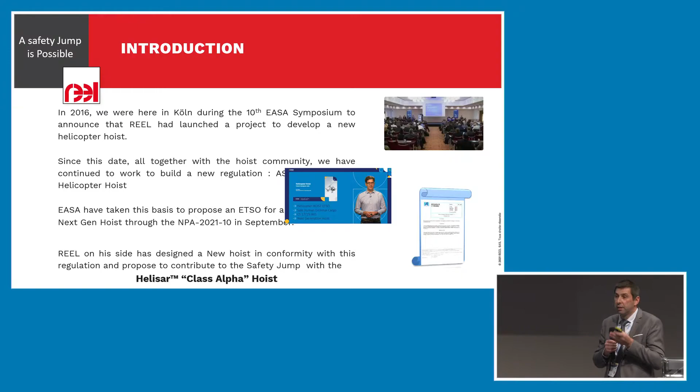It is usual to say that the safety of hoisting operation is based on 3 pillars. The first one is coming from the design itself of the product. The second one is training, huge training of operators, of users, and a promotion to all these users of a common operation standard to contribute to the mission safety. The third pillar is based on the maintenance, because the maintenance itself contributes a lot to the safety of hoisting missions.

Solutions to be implemented in the design can be on several factors. First, improve the safety target. When you design with in your mind a high safety target, you can design something good. You can increase safety factors, redundancy, and take safety into the design at the beginning.

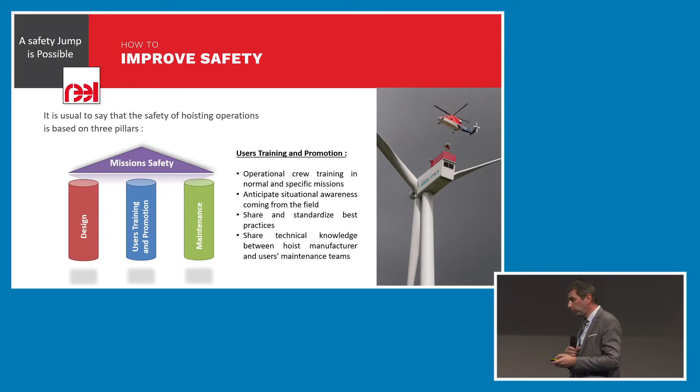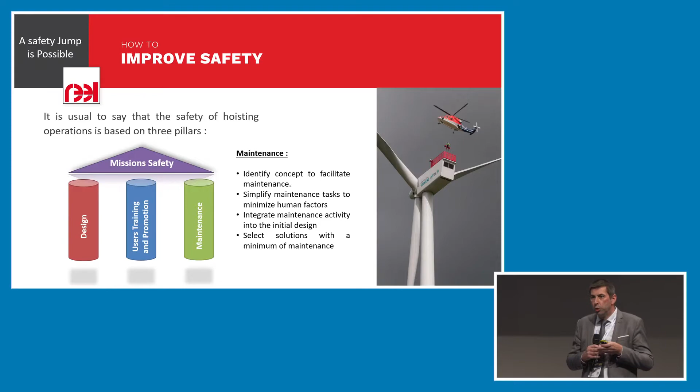The third pillar is about maintenance, and to contribute to mission safety with maintenance is first of all to identify concepts to facilitate maintenance, to avoid at a maximum human factors in the maintenance field in order to contribute to mission safety.

The second point is to simplify maintenance tasks, to minimize human factors, and to integrate maintenance activity into the initial design. Because when you develop a new product, taking into account the maintenance activity from the beginning is a good way to simplify and to contribute to mission safety. And the fourth point is to select solutions with a minimum of maintenance.

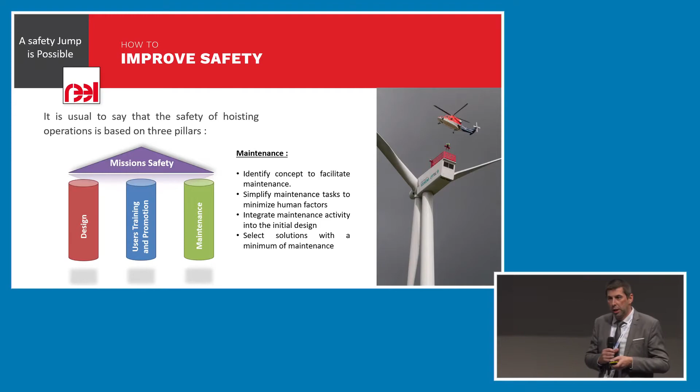So, our vision for us as a new hoist manufacturer is to, and the objective is to reach mission safety. We have decided to apply all these precepts to the three pillars in the new hoist design. How have we performed this?

First of all, REEL, as I said before, is a lifting and handling equipment manufacturer for 75 years. So, as a specialist of lifting devices, we have taken our expertise for safety in airborne context, in different kinds of application, like nuclear, defense, offshore application, in lifting systems, and we have taken all this data to provide our expertise to design a new product dedicated for helicopter hoisting operation.

Secondly, we have exchanged with operators to understand operational constraints and expectations in both civilian and military environments. For sure, we have discussions with authorities and participation in the regulation definition in order to integrate solutions for safety into the design.

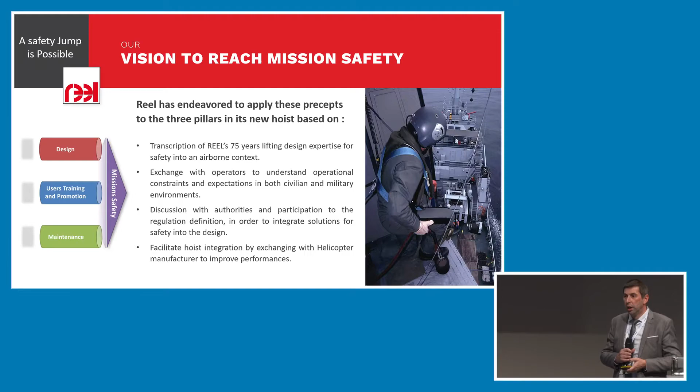And the last point is to facilitate hoist integration by exchanging a lot also with helicopter integrators to simplify the installation and to improve the performance of the system. That is a good solution also to improve safety. So we have developed our product here with several kinds of solutions, and I will explain how we have implemented this solution and this design in the product.

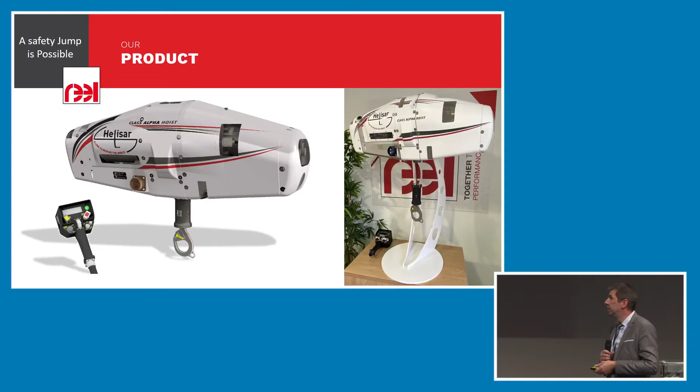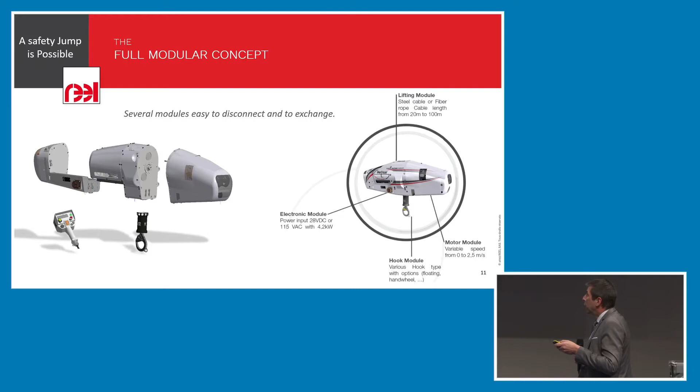First of all, it's based on a modular concept. Why a modular concept? Because each module of the system has different functions, different expectations, and maintenance specifications. The advantage of this modular concept is also standardization.

Why standardization, and why can this standardization contribute to safety? Because when you commonalize systems, equipment, modules on an entire fleet of helicopters, you have the same principle in terms of maintenance for all the fleet, and you don't have specific activity for a specific platform and change to another platform. So, the modular concept also gives availability and versatility.

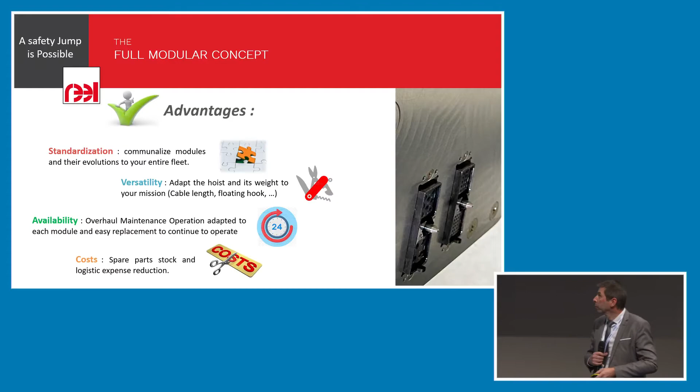The second point is a more technical point. In order to improve safety, we have analyzed a list of problems and incidents in operation, especially with the winding of the cable onto the drum. According to our expertise in other fields of industry, as I said before, we have implemented into the new hoist a design based on the capstan system to separate the lifting function and the storage function of the cable.

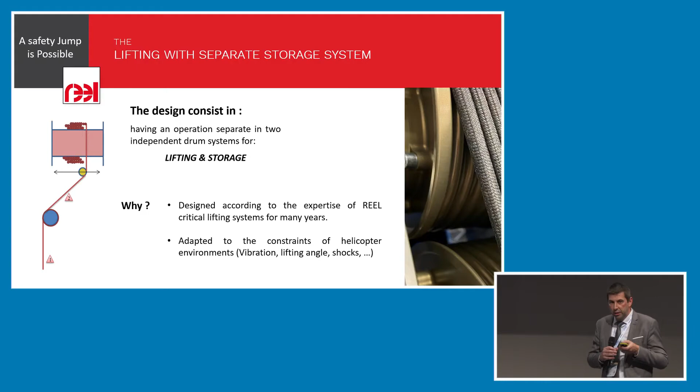This solution allows us to solve a lot of constraints of the helicopter environment, like vibration, shocks, and so on, that are frequent in the hoisting mission. For safety, the lifting system is designed with a construction that provides total control of the speed and avoids miswrapping risk during reel in and reel out of the cable. Its accuracy, improvement of lifetime, and cost also, because you need no conditioning of the cable to put the hoist in operation.

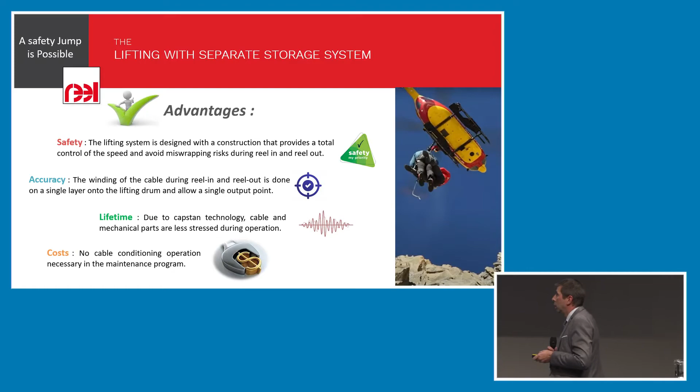Third point, according to the expectations of a safe hoisting mission, the cable is very important. We have implemented into the system an innovative cable that is based first on a steel cable designed for lifting missions. According, again, to the expertise of REEL in lifting equipment, we have implemented a fully anti-twisting steel cable that avoids a lot of problems encountered in the field today.

And we have developed a patented solution in order to put a jacket external to the steel cable to protect the lifting cable from the external aggression of environmental conditions.

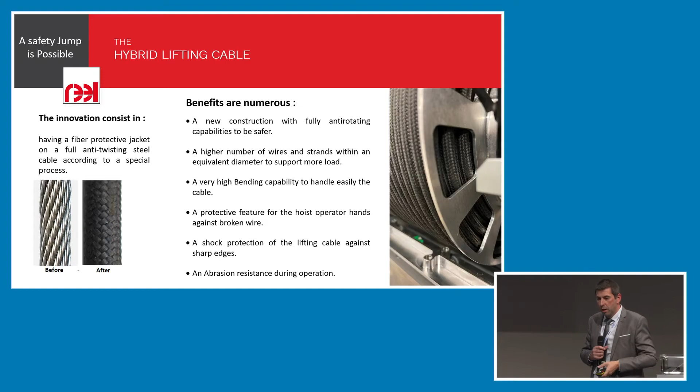For safety, with this cable, we can provide the highest safety factor to secure operational missions with this steel cable. We can provide robustness, because the fiber jacket protects the cable against abrasion and inappropriate events during the operation: shocks, entanglement, impact. The steel cable inside the jacket is protected and this ensures lifting security and lifting safety.

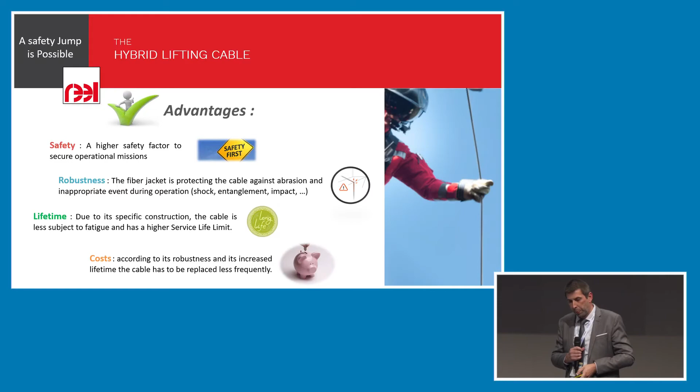For sure, we implement this also for lifetime, because as the cable is a completely adapted lifting cable, it is less subject to fatigue and has a higher service life limit. And this decreases the cost of the system.

Another point also, it's a huge safety feature: the overload protection system. The overload protection system has a function for the helicopter during an operation mission to protect the helicopter itself from an entanglement, in some case, but also to protect human and equipment suspended to the hoist. And these two functions are different because the objective is not the same.

In the first case, in case of entanglement, you need to protect the helicopter by reeling out the cable in order to let the helicopter move when you are blocked. And for human protection, you have to arrest the HEC, the human external cargo, in a certain way to protect the person and not to endanger his skeleton.

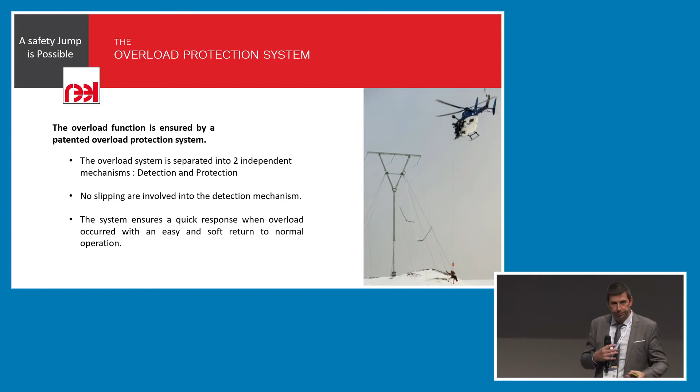So, to reach this target, that is new in the new regulation, we have decided to separate these two functions. We have a first function that is a purely mechanical system that detects the overload situation. And then, after this detection, to protect the system, we have a braking system that allows us to protect the person and the helicopter.

This system ensures a quick response when overload occurs, and an easy and soft return to normal operation. That's a very important thing because some overload occurrences can be encountered in the same mission when you are in some condition like this.

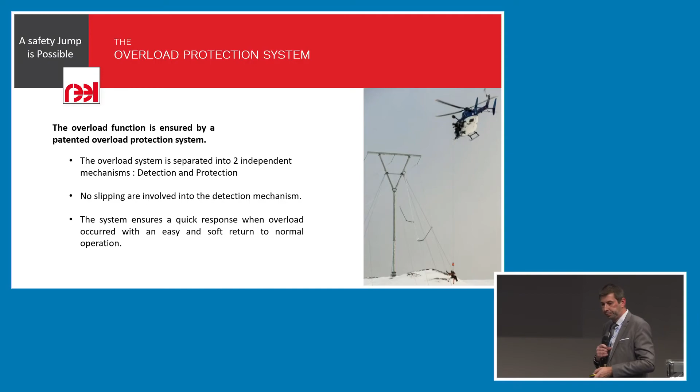From a safety perspective, this overload system is developed according to the regulation with the highest safety factors to protect the helicopter and the crew. As I said before, it's a detection limit that is very accurate, so it can protect the helicopter and the person whatever the environmental condition.

There is also a maintainability solution, a mechanical system, with no frequent verification activities of this system. And reliability, because it's a very simple system implemented into the design.

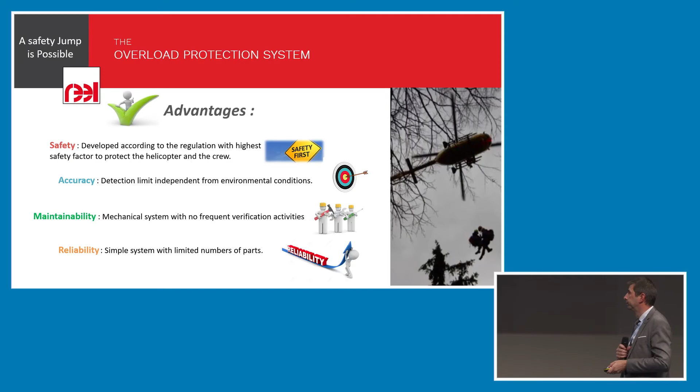In order to improve safety and to simplify the maintenance, data from the field, from operation, can be collected and inspected during and after the flight and the mission. So, with this design, in order to improve safety, and as said in the previous presentation, to take data from the field to continuously improve the safety design, we have decided to implement data monitoring to continuously record temperatures, payload, cable lengths for the hoist.

And we analyze this data in order to continue to improve the design during the evolution of the system. For sure, we can also record usage data, some specific events, overload, angle exceedance, transition to over temperature of the system, and so on, and also all the failure information.

But, as I said in the beginning, the first aspect of the design is that it is completely modular. One important thing with this modular concept is to keep the good modules together as a complete hoist and to ensure that the right module is in the right place on the right helicopter. That's also recorded in the configuration data system that ensures each module is implemented into the helicopter.

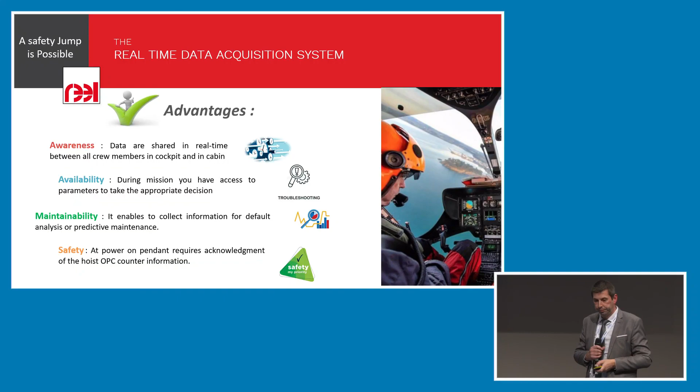With the data acquisition, we can have information on the hoist itself and ensure that your hoist is ready to start the mission. With the OPC cycle counter, flying hours, and this, you know exactly before leaving the base that your helicopter and your hoist are ready to perform a safe operation. That's, for us, the best way to contribute to the mission safety for hoisting operations.